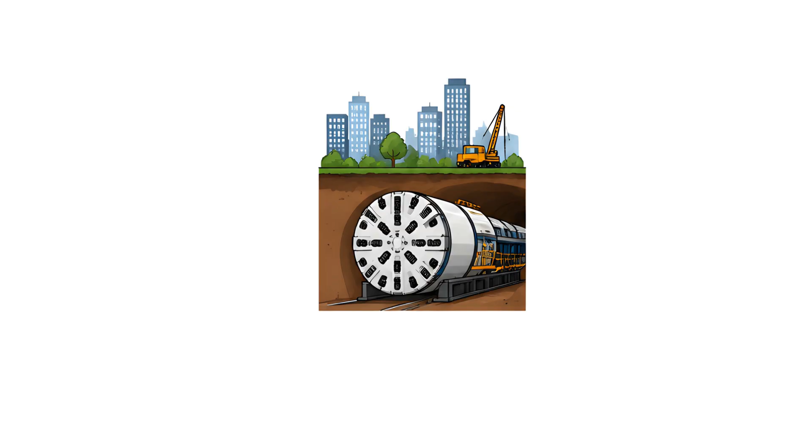The company aims to dig many tunnels deep beneath our cities. They plan to make these tunnels affordable and super efficient. Their goal is to fix surface level congestion one tunnel at a time with a rapid transit solution. The technology behind it involves specialized drilling machines. These machines are designed to work much faster than traditional tunnel boring equipment.

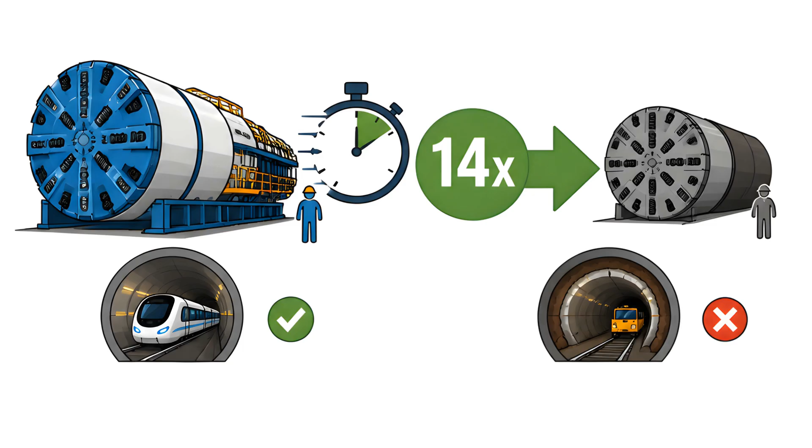One major claim is that they can dig tunnels 14 times quicker than current industry standards. This incredible speed increase is a huge part of their strategy. It means projects can be completed in a fraction of the usual time and expense. Another big promise involves cost. They say their tunnels will be 10 times cheaper to build.

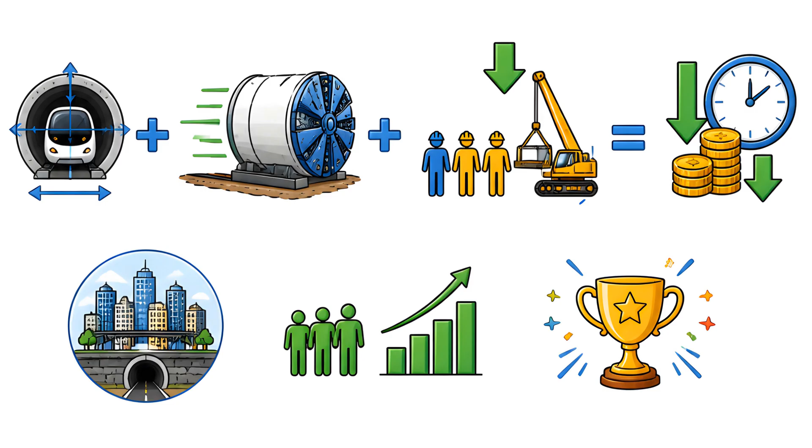This is achieved through smaller tunnel diameters and also increased digging speeds. Less time digging means less labor costs for construction crews. These are staggering numbers if they can truly achieve them consistently across large-scale projects. The reduced diameter itself saves enormous amounts of material.

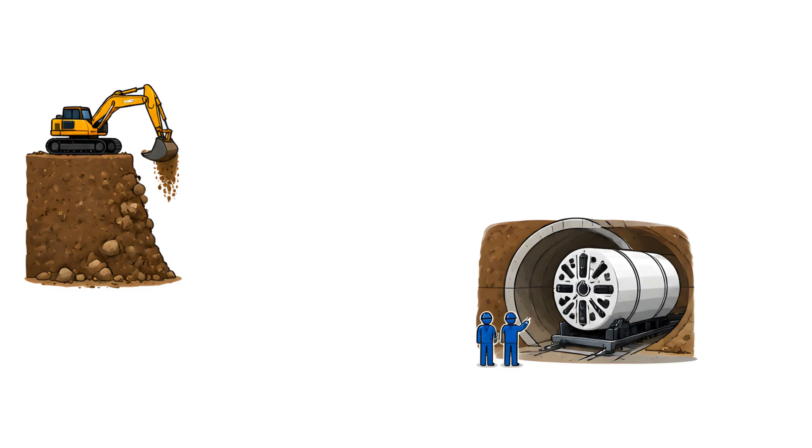A traditional subway tunnel can be 30 feet wide, accommodating large trains. Their tunnels are usually 12 feet wide, designed for smaller vehicles. This 60% reduction in width means far less dirt needs removal, saving millions in disposal costs. The company started in 2016 with a focus on solving urban traffic gridlock.

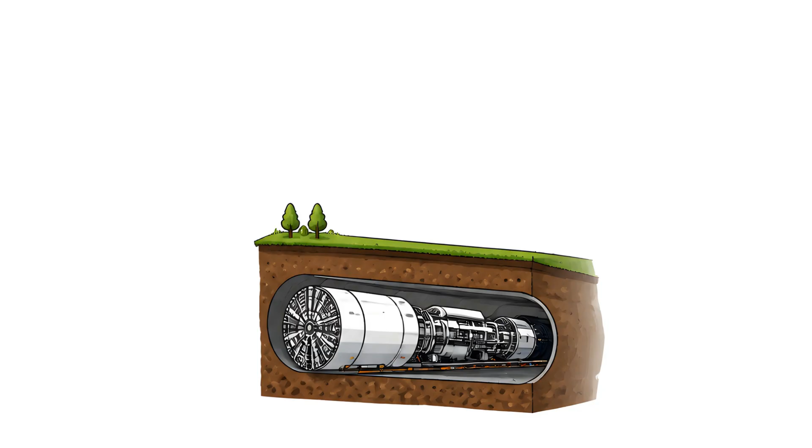Its first significant achievement was a test tunnel. This tunnel was in Hawthorne, California, directly beneath SpaceX property. It was completed in 2018 after nearly 2 years of work. This test showed their initial capabilities and engineering prowess. It was a 1.15-mile tunnel, a considerable length for a first attempt.

People could ride through it in Tesla vehicles modified with deployable guide wheels. This initial demonstration gave a glimpse of their ambitious vision for urban travel. The tunnels are typically 12 feet in diameter. This size is enough for one car or public transport pod to move safely.

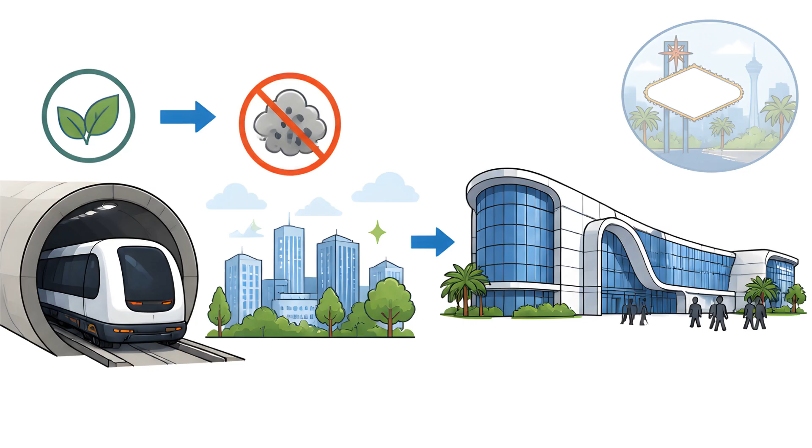The vehicles travel on dedicated electric skate systems, or sometimes they are just Teslas on their own wheels, driven by human operators for current safety protocols. The zero emissions within the tunnels are a key environmental benefit, keeping urban air clean. Their most known project is the Las Vegas Convention Center Loop. It is called the LVCC Loop.

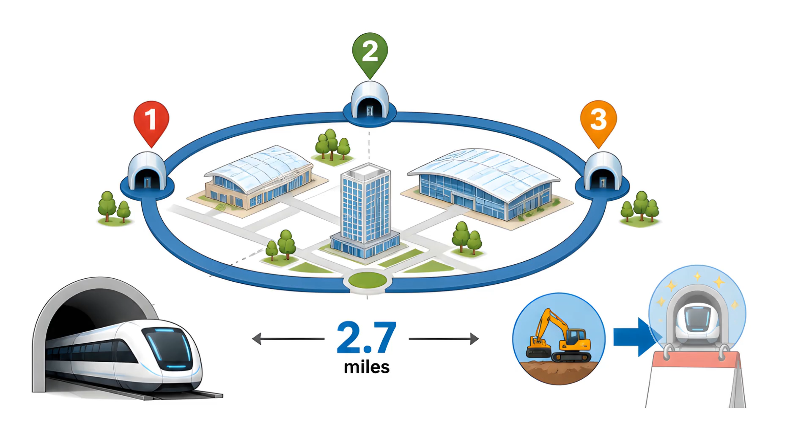This system serves the enormous 4.7 million square feet convention center complex. It has 3 passenger stations strategically spread across the campus for maximum accessibility. The loop itself is 2.7 miles long, forming a vital internal transport network. It opened for public use in 2021 after a swift construction period.

The LVCC Loop moves a lot of people every day of operation, often during peak convention times. It can transport 4,500 passengers per hour, greatly enhancing attendee mobility. This speed greatly reduces walking times across the huge campus. Imagine walking for 45 minutes between convention halls in the desert heat. Now imagine riding for just 2 minutes instead in a cool electric vehicle. That is a massive saving in time and energy for thousands of attendees and exhibitors.

The cost for this entire system was $47 million, a relatively low price for such infrastructure. This figure includes the tunnels and stations and all operating equipment. There are about 100 Tesla vehicles running within the loop. These cars are currently driven by human operators for safety and initial system proving. Full automation is the long-term plan for greater efficiency and reduced operational costs.

This project showcased a practical application of their technology. It proved that fast underground transportation could work reliably. It also demonstrated the ability to complete such infrastructure quickly and within budget. Convention attendance has already benefited from this improved access and convenience. The economic impact on Las Vegas is noticeably positive with more successful events.

The bigger dream for Las Vegas is the Vegas Loop. This project is far more ambitious and expansive. It plans for 29 miles of tunnels. It will have 51 stations. These stations will connect 55 different destinations across the city. Think hotels, casinos, the airport, and the famous Las Vegas Strip Entertainment District. This vast network could dramatically reduce surface traffic on already congested roads, especially on busy weekends.

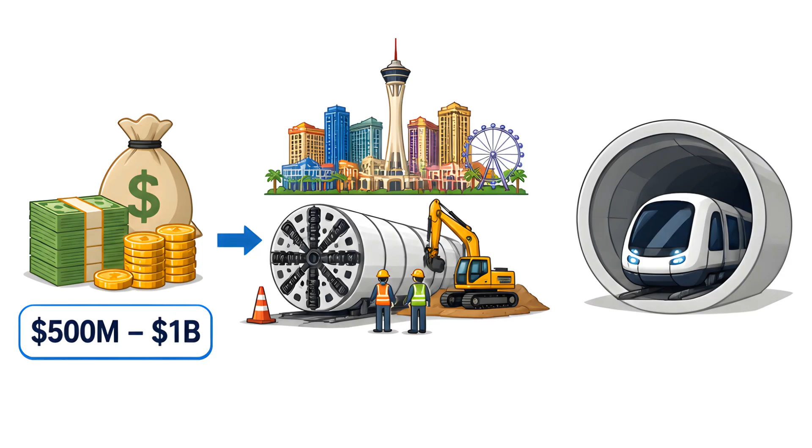The estimated cost for the Vegas Loop is between $500 million and $1 billion, an investment of considerable scale. This project is much bigger than the LVCC Loop, by far a truly citywide solution. Phase 1 of the Vegas Loop covers 3.4 miles. It includes 5 stations servicing key tourist areas. This phase alone could carry 90,000 passengers per hour during peak demand.

This massive capacity would transform urban mobility for Vegas visitors and residents alike. It would allow faster travel between major tourist attractions and business hubs. Imagine cutting a 20-minute taxi ride down to 5 minutes, or even less. This kind of efficiency could change tourism logistics completely, making visits much more enjoyable.

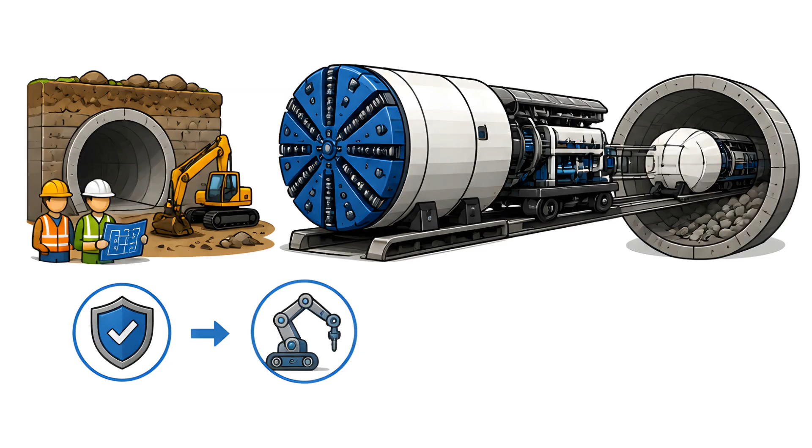Building these tunnels is a complex engineering feat. The Prufrock machine is their latest tunneling device. This machine is designed to dig faster and more autonomously. The company hopes Prufrock can achieve its target speeds regularly. Their ultimate goal is 1 mile of tunnel per week. Reaching this speed would be revolutionary in the construction world.

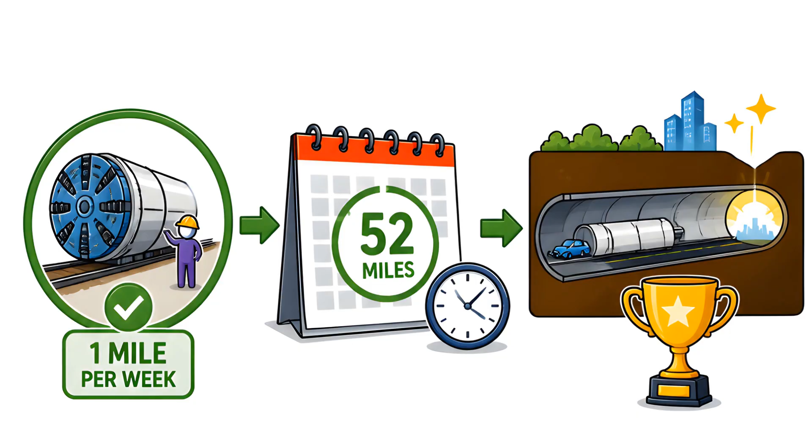It would mean digging 52 miles of tunnel in just 1 year, a record-breaking pace. Currently, their progress is slower, perhaps around 1/10 of that target speed for now. But they are always improving their methods and machine designs with each new iteration.

Prufrock features a continuous mining process. This means it can dig and reinforce the tunnel lining simultaneously without interruption. This simultaneous action is a key part of their claimed speed advantage. Traditional machines often stop to install tunnel segments, a time-consuming process. Prufrock does not stop for this critical step, it just keeps moving forward. It is truly revolutionary.

There are many challenges for the Boring Company moving forward. Regulatory hurdles are a big one, slowing progress significantly. Getting permits for underground construction is often very slow and complicated across different municipalities. Each city has its own set of rules and environmental assessments to navigate. Public perception also plays a role in public acceptance and political will.

Some people question the practicality of car tunnels as a primary solution. They wonder if this is the best solution for urban traffic problems. Critics argue that adding more car capacity simply encourages more driving, leading to new congestion elsewhere. This phenomenon is known as induced demand. Scaling up operations is another massive challenge, requiring immense logistical coordination. Digging 1 or 2 tunnels is vastly different from hundreds of miles of interconnected network.

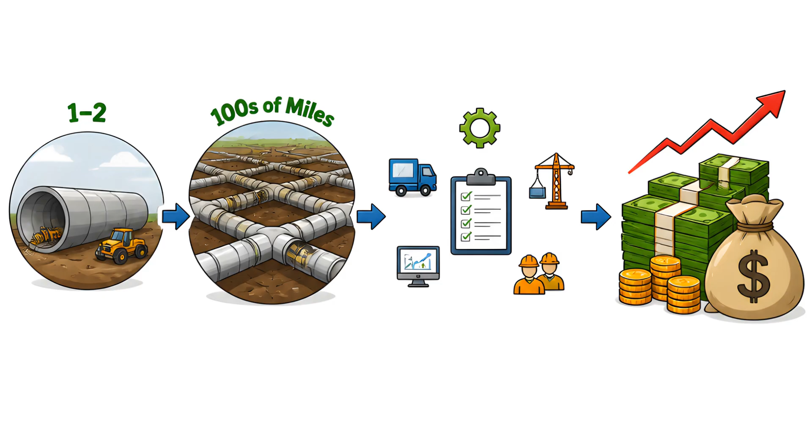Financial viability is always a concern for such huge infrastructure projects. The initial investment costs are enormous, even with their claimed cost reductions. Convincing investors and cities of long-term returns is crucial for future expansion. Safety during construction and operation is paramount and non-negotiable. Preventing collapses and ensuring air quality inside tunnels are critical for any underground system. Integrating emergency exits and robust ventilation systems is crucial for passenger safety and peace of mind.

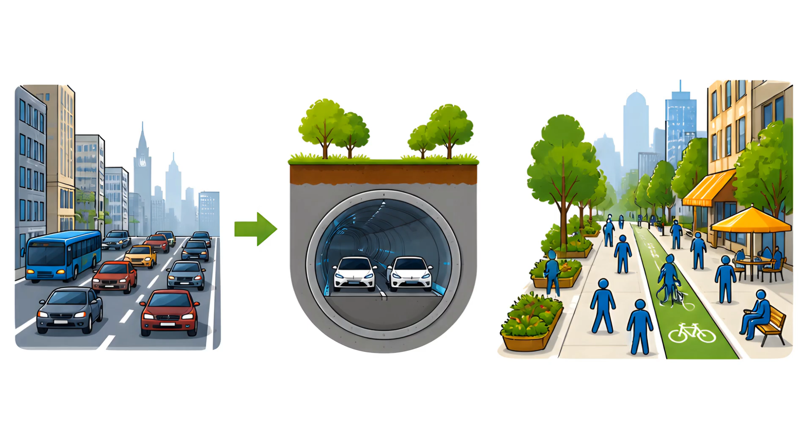Elon Musk often emphasizes the environmental benefits of these systems. Electric vehicles inside tunnels mean 0 local emissions, a huge plus. This is good for air quality in crowded cities, especially those with persistent smog problems. Reduced surface traffic could also lead to more green spaces above ground over time. The idea is to reclaim city streets for pedestrians and bikes, enhancing urban living.

This vision aligns with many modern sustainability goals and urban planning efforts. But reaching this scale requires huge commitment and investment from many stakeholders. It is a long-term play that requires consistent political and public support for decades.

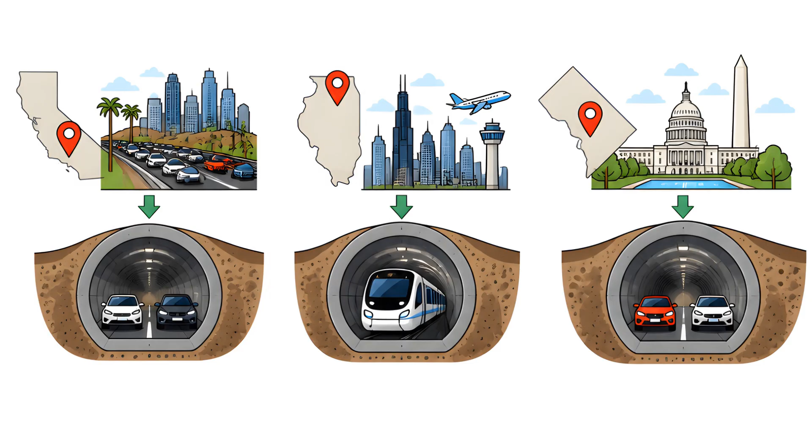The company has explored other projects too for various metropolitan areas. A proposed tunnel under Los Angeles was considered for several years to ease freeway congestion. A Chicago O'Hare Express tunnel also gained significant attention a few years ago. There was even talk of a tunnel connecting Washington, D.C. and Baltimore for high-speed travel. These projects faced various obstacles and bureaucratic delays. Community opposition, funding issues, and regulatory complexities often stall progress indefinitely.

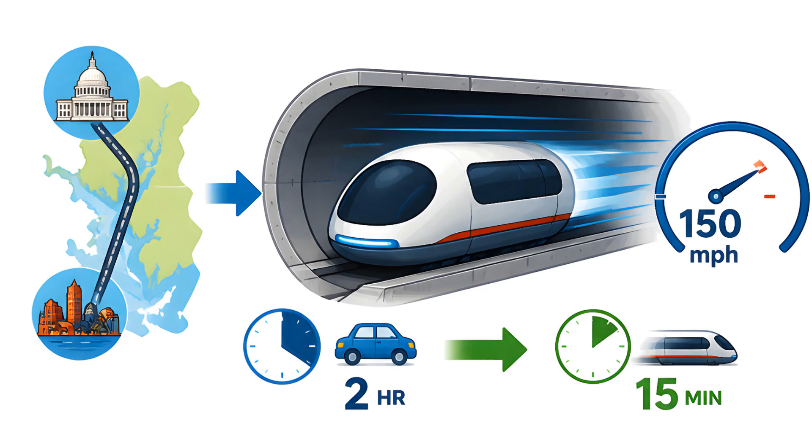The DC-Baltimore project, for example, aimed for an incredibly fast transport system called Loop. It envisioned people traveling at 150 miles per hour in special autonomous pods. This speed would cut travel times dramatically from 2 hours to perhaps 15 minutes, a truly transformative change. But such proposals require immense capital and political will to move forward and become reality. The Washington, D.C. tunnel permit was granted in 2018 for a test section. However, progress has been slow on that front with no major construction.

The Chicago project involved a $1 billion proposal to connect downtown to O'Hare Airport in 12 minutes. That plan eventually fell through due to a change in city leadership and priorities. These examples show the difficulties of large-scale infrastructure development.

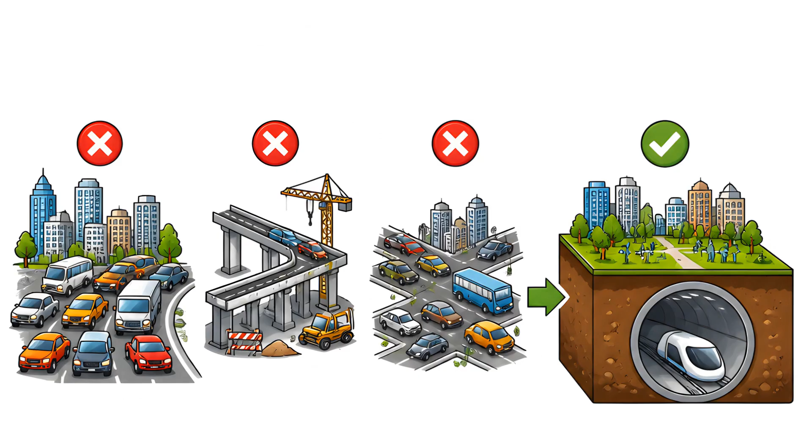The concept of a 3-dimensional transport network is central to Musk's thinking. Instead of building up or out horizontally, we dig down. This frees up valuable surface space for other uses. It also allows for direct point-to-point travel underground. This reduces detours and travel times significantly for commuters. It is a bold vision against the traditional two-dimensional road network of today.

Imagine bypassing all surface-level traffic lights and junctions and never stopping. This would save countless hours of commuting time for millions every day. And it could make cities much more livable by reducing noise pollution and visual clutter from vehicles. The freedom from traffic lights and stop signs means continuous movement and maximized efficiency. This continuous flow is what enables the high speeds and high capacity in their systems.

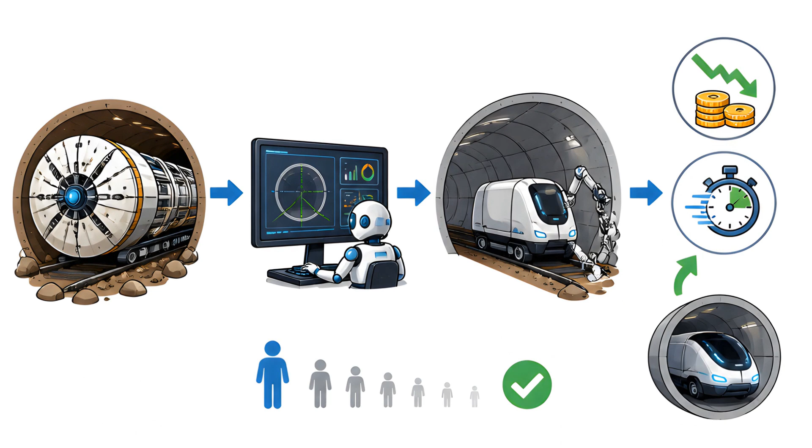The future plans for the Boring Company involve refining their technology even further. They aim to make the tunneling process fully automated, requiring minimal human intervention. This would further reduce costs and increase speed even more dramatically. Developing specialized autonomous vehicles for the tunnels is also key to their long-term vision. These vehicles could be smaller and more efficient than regular cars, maximizing tunnel capacity, or they could be platforms for public transit, moving many people at once.

The promise of a traffic-free future continues to drive their innovation. It is an incredibly ambitious undertaking, one that could change urban landscapes forever if successful on a grand scale. But the path ahead is long and filled with many obstacles and engineering challenges. The engineering and financial scale is truly immense, requiring sustained effort and funding.

Their success could redefine how we move around large metropolitan areas and solve congestion. This is a game-changing idea if it works as intended, with enough investment and patience from all involved. The shift from human-driven vehicles to autonomous pods is a large technological leap itself. It promises even greater capacity and safety within the tunnels, making them incredibly efficient. This would provide a reliable, consistent travel experience for everyone using the network.